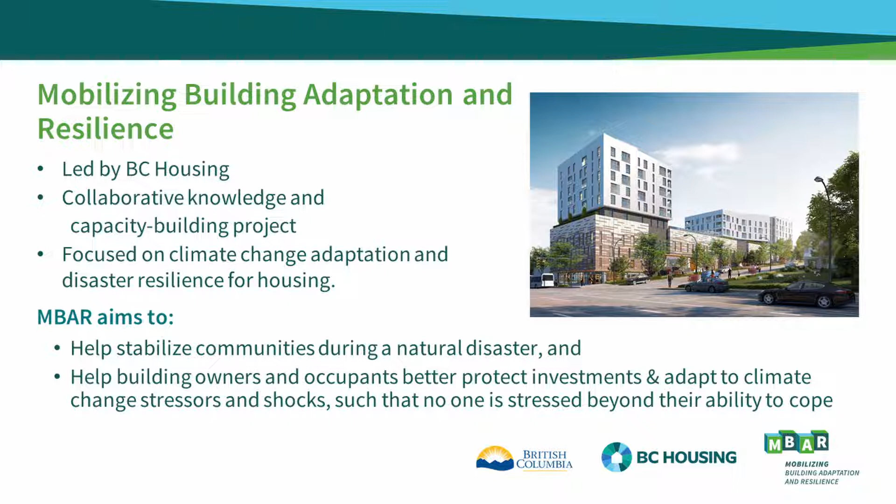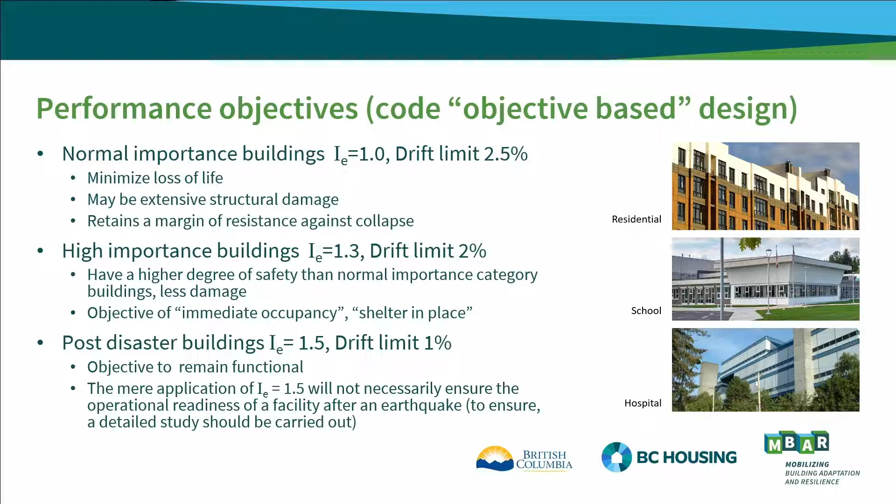This is just a refresher from session 1 about the current objective-based codes. For normal importance buildings, the objective is to minimize loss of life, but there may be extensive structural damage. High importance buildings, the objective is immediate occupancy to shelter in place, and post-disaster buildings to remain functional, but with no guarantee that that will be fully achieved. And there's a variation in performance due to these different ductility-related factors that can be selected for the seismic force resisting system. So variability of performance.

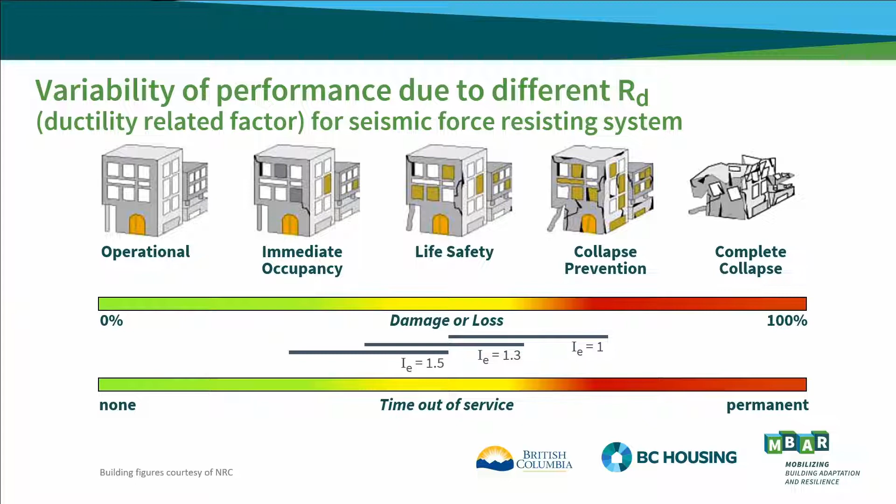That's the beauty of performance-based design, to try and get a more definitive, quantifiable, understandable performance of the structural components, moving towards the target of no structural damage for different types of earthquakes. Performance expectations can be tailored and customized for each building depending on use, occupancy, expectations for business continuity, expectations of repair time and repair cost. And again, it can be owner specified as long as the basic code requirements are met.

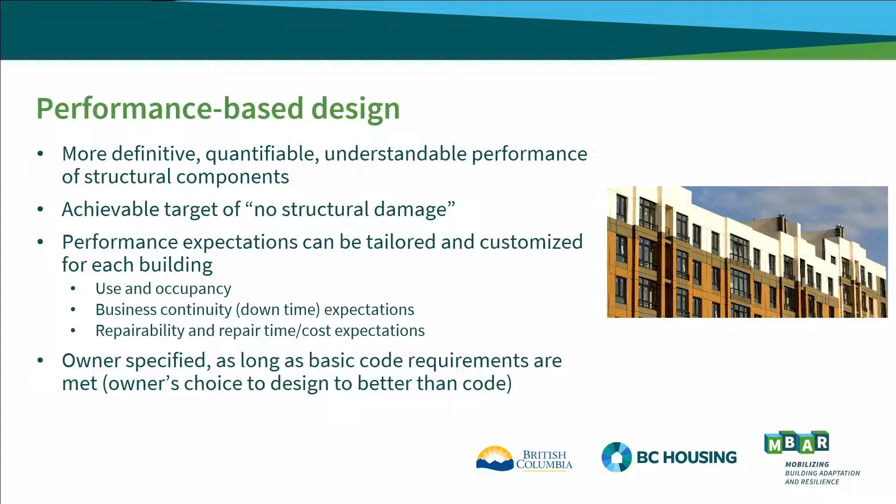This illustrates the difference between the 4 different levels of earthquakes where data is readily available on the Earthquakes Canada website. On the left, the bar graph shows the 2% in 50, the code level earthquake, 100% of the code level earthquake. Then 3 lower levels, more frequently occurring but lower intensity earthquakes, designated as 5% in 50, 10% in 50, 40% in 50. Those are the probability of happening over those 50-year durations.

The different colored bar graph shows the percent of demand relative to the full code level - 70, 50, 20 - so reduced demand on the building for these more frequently occurring but smaller earthquakes. And there's the ability to specify performance for all these 4 levels rather than just the one the code specifies.

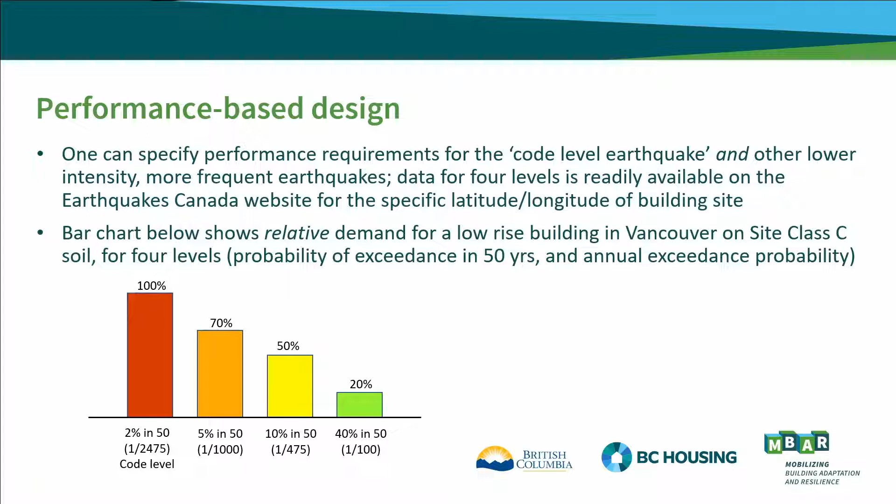NBC 2020 has started to move towards performance-based design in certain sections for certain buildings. No structural damage is an objective for post-disaster buildings in moderate and high seismic areas, where they need to behave elastically for that lower 5% in 50-year earthquake, with a reduced drift limit of 0.5% to better control damage to non-structural components. High importance buildings in high seismic hazard areas similarly need to behave elastically, but for a lower intensity 10% in 50-year earthquake with the same drift limit control, plus enhanced connection design - no yielding of connections for the non-structural components.

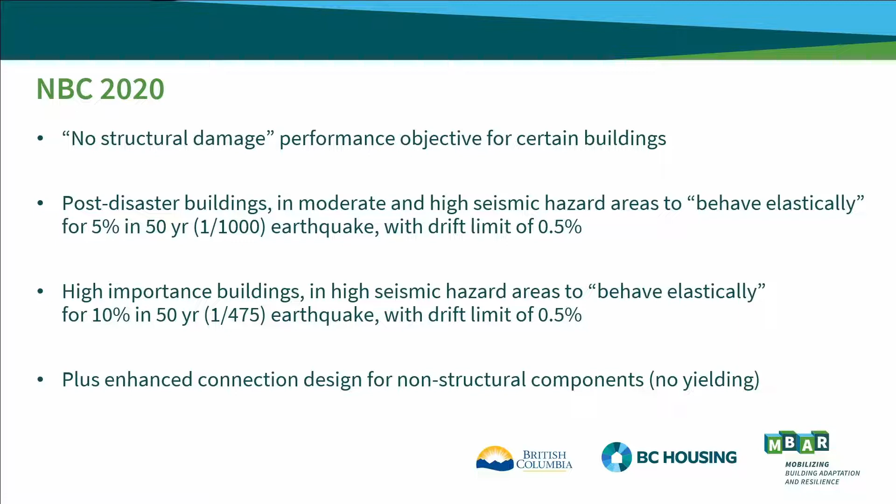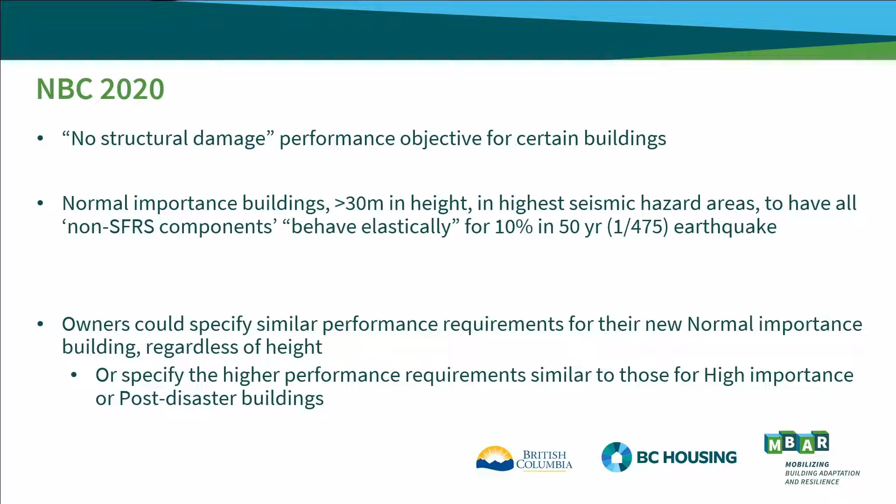A no structural performance objective is also included for normal importance category buildings more than 30 meters high in the highest seismic hazard areas, but this is for the non-seismic force resisting systems and components of the building. They have to behave elastically for that lower intensity 10% in 50-year earthquake. Again, an owner can specify performance similar to these in the 2020 code for any type of building that they have.

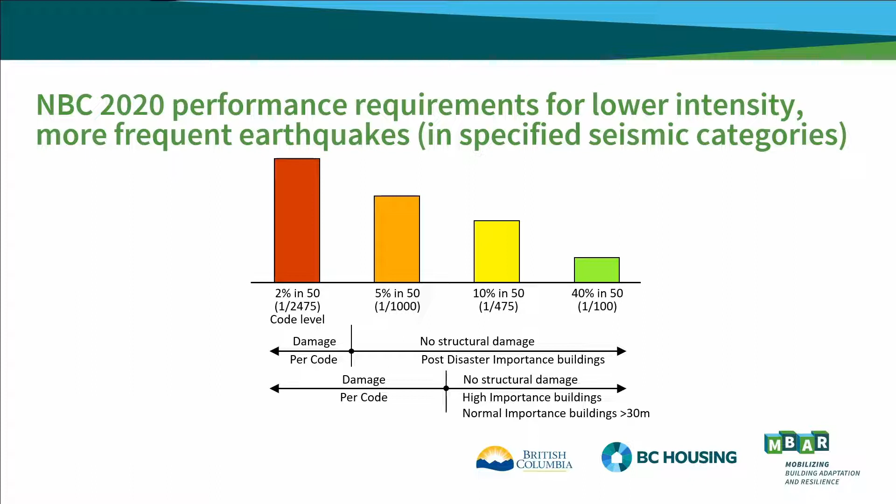For high importance buildings and normal importance buildings more than 30 meters, their non-SFRS components have no structural damage for the 2 lower intensity levels of earthquakes shown on the right, but damage per code for the 5% and 2% in 50-year level earthquakes. Graphically, using the cartoons from previous sessions, for these groups of buildings and the levels of ground motions noted, the blue bar indicates no structural damage performance is expected - not variable, consistent for those types of buildings.

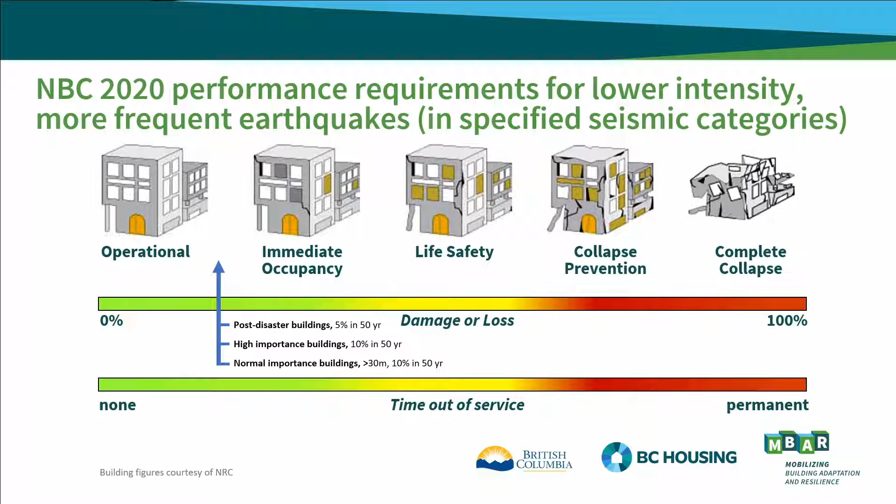Performance-based approach can be used for alternative design, alternate to that specified in the code. Pre-approval should be obtained from the authorities having jurisdiction. It will require external peer reviews to suit the AHJ requirements. This is now commonly done in the US for certain groups of buildings, and many BC firms are experienced in this approach.

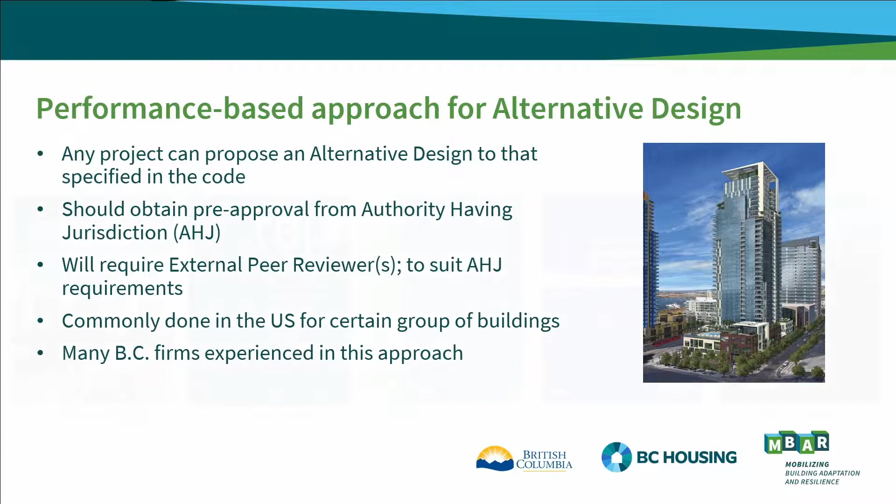This shows there are very good guidelines and standards in the US - the first 4 documents shown on the left - to assist engineers and owners with performance-based design. On the right, EGBC has produced a similar guideline in BC for tall concrete buildings in 2022.

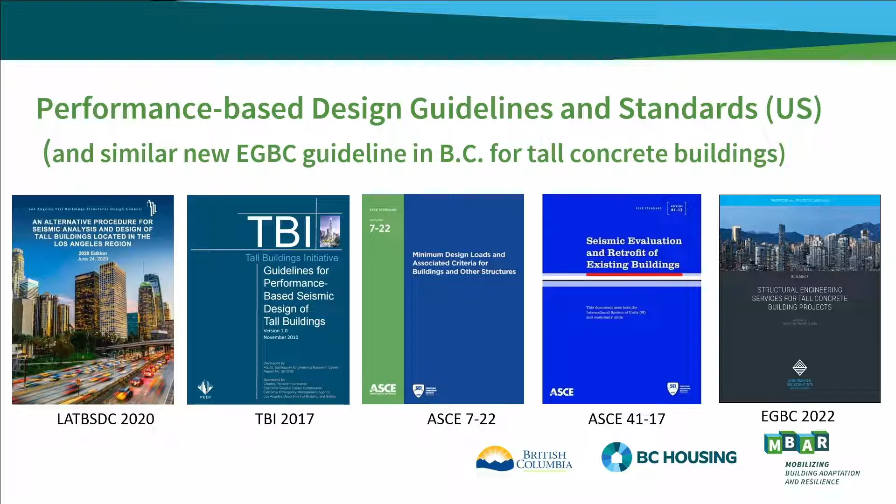The performance-based design approach requires nonlinear time history analysis. It identifies the specific demands on the building components to make sure they're behaving in the manner expected. In BC, there are 2 suites of 11 earthquake ground motions used as part of that time history analysis.

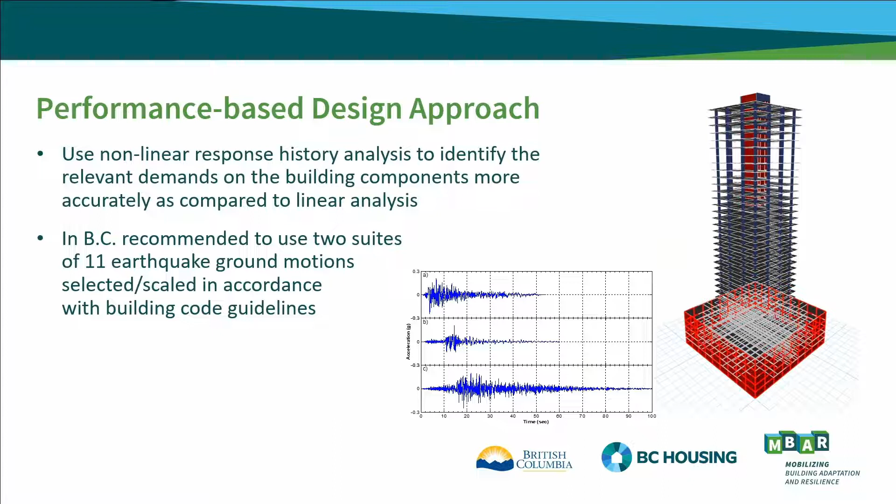There are also performance-based guidelines in Canada, specifically for bridges. That code has very specific performance requirements for different types of bridges and for 3 different levels of earthquakes, including requirements for strain, stress, when concrete can spall, serviceability requirements, and the like.

There's a significant initiative underway right now at Codes Canada to bring full performance-based design into the NBC code for buildings. Perhaps some more provisions in NBC 2025, with expectations of significant movement towards performance-based design in NBC 2030.

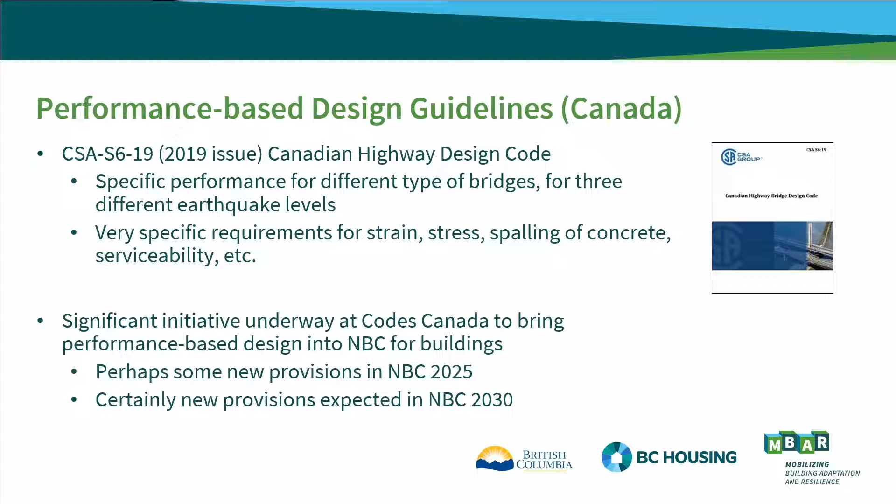So how does one measure seismic performance? FEMA P58, Seismic Performance Assessment of Buildings, is a 7-volume document with very extensive guidelines on procedures to assess performance. It's a probability-based assessment that can assess different scenarios or methodologies.

You can assess the damage and performance of an earthquake of a given magnitude at a given distance from your site. You can use a response spectrum type approach similar to the design for new buildings, or it can be time-based, over say a 60-year period, considering all the possible earthquakes that could happen at that building to assess its performance.

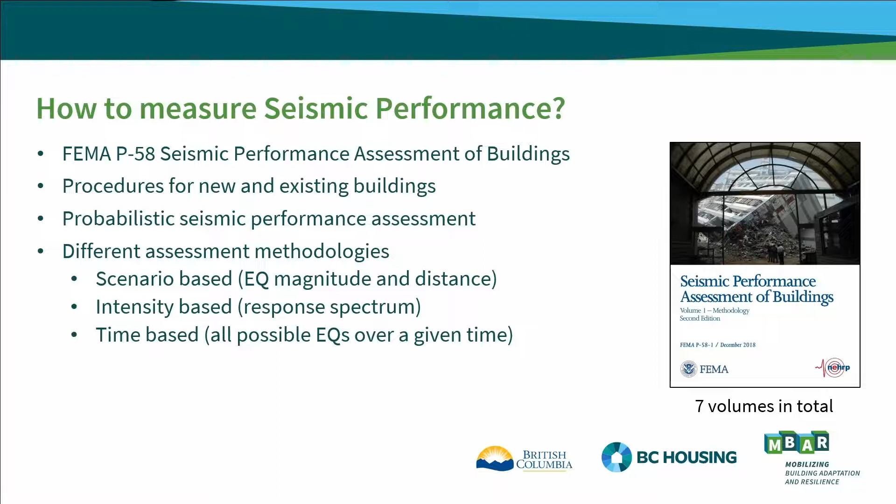The beauty is there are 5 key metrics: repair cost, repair time, casualty rate, the probability of being red carded, and making sure the building is indeed repairable after the earthquake.

There are good tools available to do this kind of assessment. FEMA originally came out with a tool called PACT, but that has now been superseded by other software. SP3 needs licensing on an annual basis. It includes impedance factors, which I'll talk about shortly, and it has a very good database and is constantly updated with good technical support.

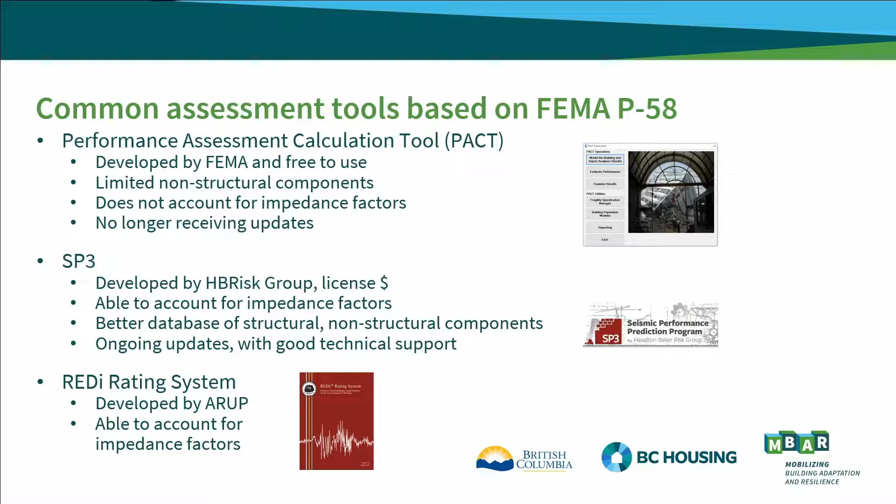The REDi rating system developed by Arup is similarly very effective at performance-based assessment. It's able to account for impedance factors as well.

Impedance factors are very important to understand because they do affect repair time and downtime. Things such as the time to get post-earthquake inspections done, financing in place, permitting in place, engineers mobilized, the contractor mobilized, and the impact of damage to utilities on the behavior and performance of the building.

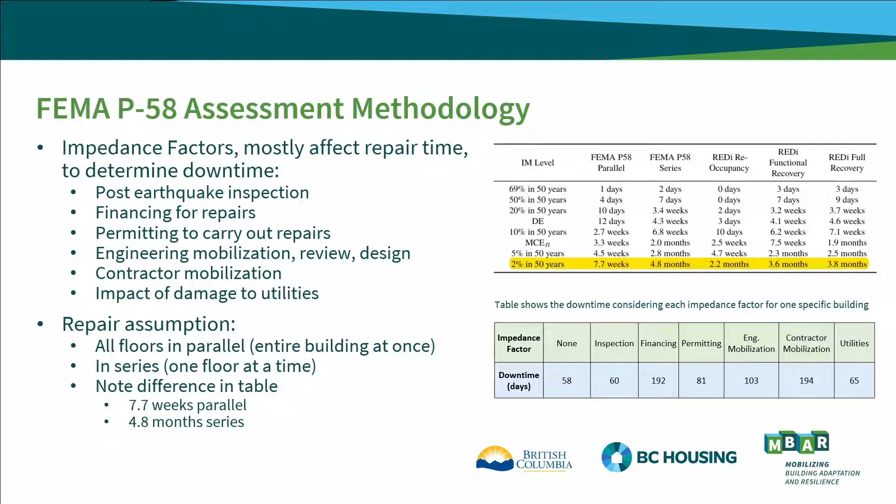In summary, performance-based design gives one a better understanding of the condition of the building after the earthquake. One can ask, what level of resilience do I want for the new building? Low repair costs, short repair time, ensure business continuity, shelter in place.

An owner can specify whatever requirements they want as long as the code minimums are met, such as the NBC 2020 provisions, or you can consider unique requirements for different portions of the building. You could create a refuge area with no damage, a functional area, and maybe part of it can be life safety so people can exit and get to the refuge area.

Alternative to code designs can be used with a performance-based analysis to meet the code objectives and any additional owner-specified requirements. These tools and the skills are readily available in the structural engineering community today. So again, hopefully you'll consider a performance-based approach for your new building.

The next session is on seismic isolation, which many consider the gold standard for seismic performance for new buildings.